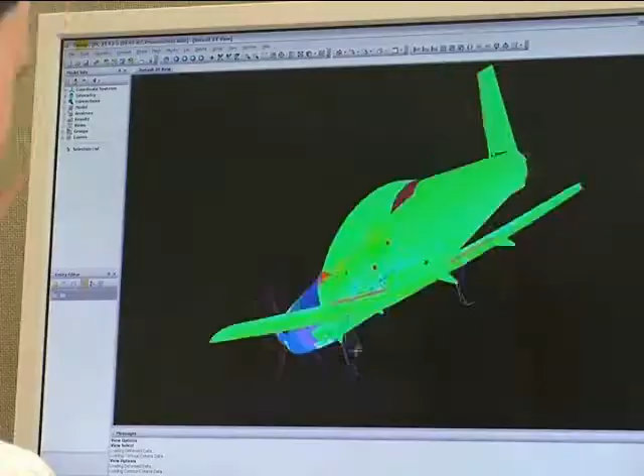The seeds of success at Pilatus Aircraft were planted with one man's vision more than 20 years ago. We started the evaluation of a CAD system in 1986. At that time we found out that UGS was the only solution that was able to provide us a deeper level of integration between the CAD and the CAM system.

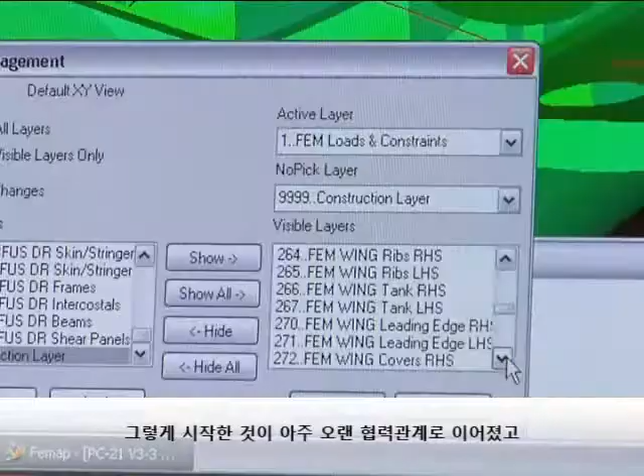This went into a very long partnership and led to the continuous growth of the system, introducing it in parallel with our new developments. The pleasant surprises are really that everything worked seamlessly with each upgrade that we made.

And finally led to the introduction of a PLM solution that we call product data management. After finding out more about the PDM system, we realized it was an obvious choice to go in that direction. And therefore we selected Teamcenter as our solution for the new projects.

The partnership between Pilatus and Siemens PLM software is a study in the successful evolution of a product lifecycle management strategy and how PLM helps transform processes.

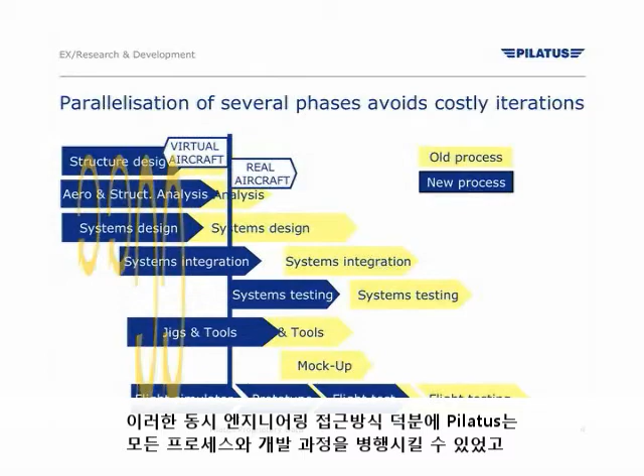The major change which we were able to make over the last 10 years is to really embed concurrent engineering into our design process. Thanks to the concurrent engineering approach, we have been able to parallelize all development process. Therefore, we were able to reduce these long, big iterations and cut them down into very, very small iterations.

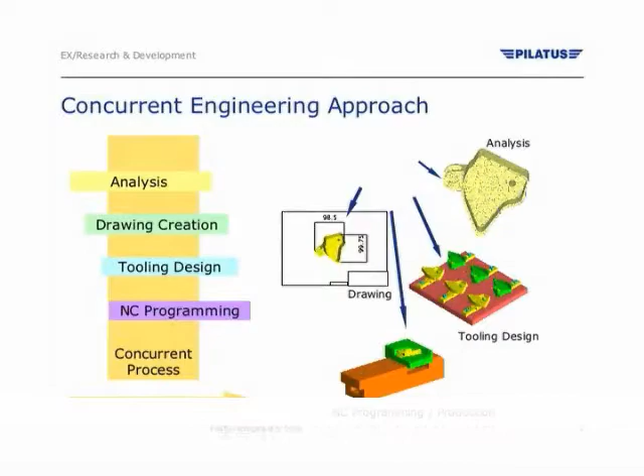We have been able to increase the level of integration, not just with the design office and the manufacturing, but also with the engineering analysis. Therefore, we were able to remove the hardware mock-ups, introducing digital mock-ups and automated testing. The level of depth of data which we could get down to exceeded our expectations.

Uniquely designed to meet the challenges in the highly competitive aircraft industry, Siemens PLM software enables companies like Pilatus to enhance innovation on many levels. The lesson learned is not to focus on the development phase of a product, but to look at the entire life cycle, cost and processes, like for instance maintenance and overhaul.

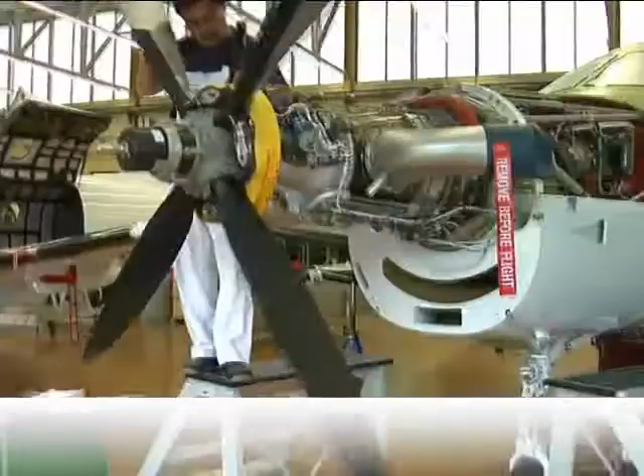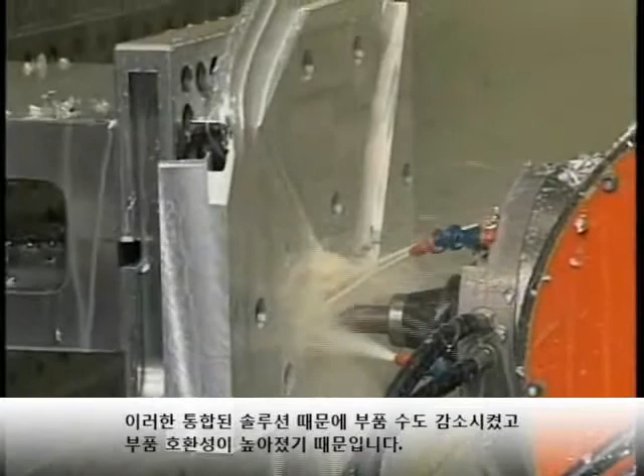Our products are highly regarded for the build quality, and thanks to these integrated solutions we have been able to provide products with reduced part counts, a high level of interchangeability.

I cannot imagine today building an aircraft or any product with the complexity of an aircraft without using a solid model CAD/CAM system, and combined to that it's essential to have product data management. There is so much data that is provided, conformity and configuration control is absolutely essential.

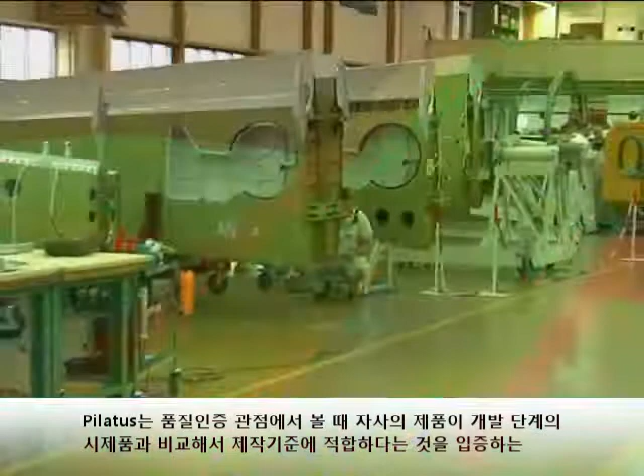From the certification standpoint, we were able, through a tight configuration control and Teamcenter engineering, to provide evidence to all certification authorities about the build standard of our serial production aircraft compared with our prototype in the development phase. This has massively reduced the time to certify the aircraft.

That means provide the right documentation to all authorities. And to do that, they have to be able to go through all the conformance documentation, and without PDM, we would never have been able to achieve that in the time which we did.

An effective PLM strategy and a long-term partnership between Pilatus and Siemens help Pilatus continue to deliver benefits internally and externally. Another part of concurrent engineering is being able to visualize everything at a very early stage. You must integrate your suppliers and your customers.

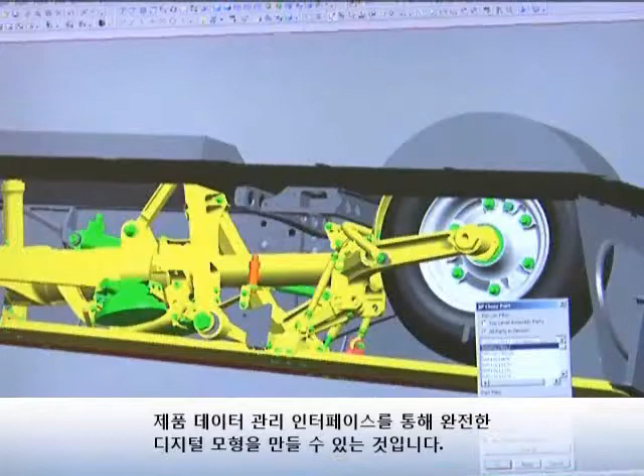Suppliers with CAD systems interfaces and product data management interfaces, it will allow you a full digital mock-up. We were able to bring in customers very early on in the design cycle. We were able to show them how the cockpit of the PC-21 would look years before the actual aircraft flew.

We had several meetings with major air forces during the development phase. These air forces could enter their requirements into the preliminary design phase, and we were able to introduce them into these expanded IPTs and to make sure that they were happy with the solution. And they were able to recommend improvements, and we took those on board and realized them.

The technology we use today has significantly reduced the development cycle, and also has improved the cost of ownership to our operators. But it's also reduced the development cost as well. Our customers have benefited from the integration of these PLM solutions through a reduced lifecycle cost.

Executives at Pilatus plan to build on their successes, follow the signs of innovation, and continue to evolve their process and products to adjust to the changing marketplace and to meet their customers' changing needs.